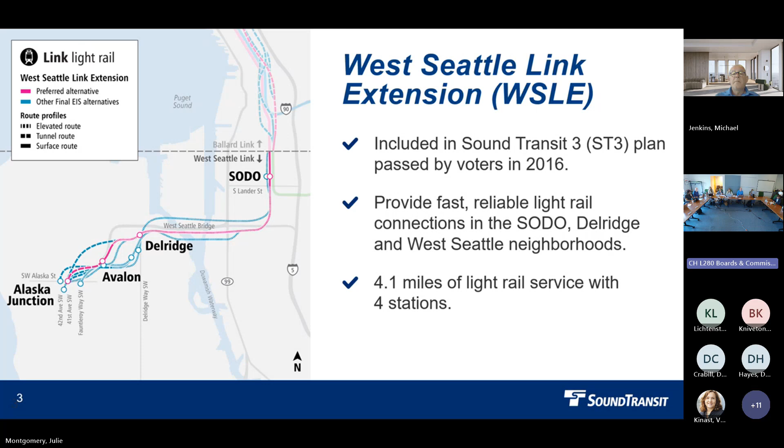So folks may recall the West Seattle Link extension was included in our ST3 plan passed by voters in 2016. We're looking forward to providing fast, reliable light rail connections in the SODO, Delridge, and West Seattle neighborhoods with 4 miles of light rail service and 4 stations.

We are currently still in the planning phase for the project until later this year. Then we'll shift towards design from 2024 to 2027 and construction from 2027 to 2032, with service starting in 2032 based on our current plan.

In the planning phase, we have gone through an extensive alternatives development process, as some of you might recall, and now are in the environmental review phase. We published a draft EIS early in 2022, and had a 90-day public comment period.

We can talk about the engagement level in that. The Sound Transit Board identified preferred alternatives or confirmed and modified them. We are expecting to publish the final EIS late Q3 of this year at the latest. After that, the board will select the project to be built, and we will have the federal record of decision and be able to move into design.

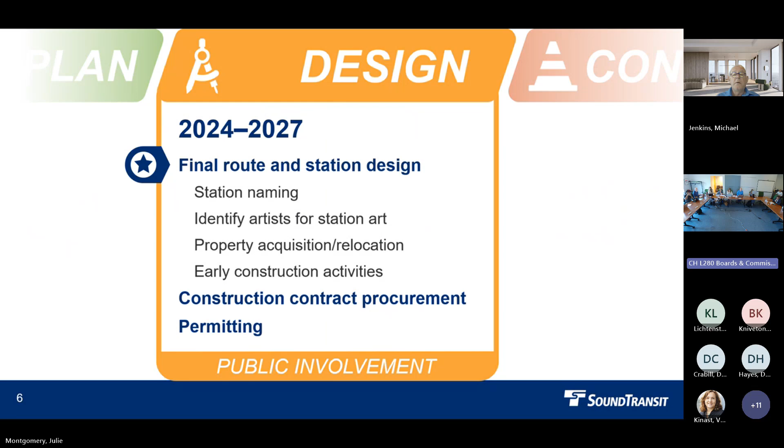In the design phase, we'll be moving towards final route and station design. Some of the activities included, but not limited to, are station naming, identifying artists for station art, property acquisition and relocation occurring robustly at this time, and early construction activities. We'll also have construction contract procurement work and, of course, our permitting.

So for the final design milestones, we are currently in the preliminary engineering design review phase, moving to 30% final design review, 60% final design review, and then a briefing at 90%. Of course, as we move through these phases, there's more and more we know. To get to 90%, we're really at a briefing phase for the project.

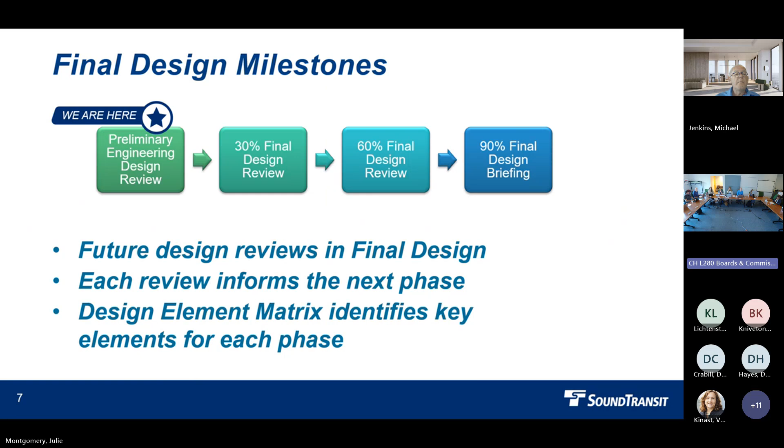Each review will inform the next phase, and the design element matrix identifies key elements for each of those phases, which involves great coordination with the city team. Yeah, for sure. Thank you so much.

All right, and so context and engagement, I'm going to hand it over to, I think, Alex. Des. Des. Yeah. Des. Yeah. Okay, there we go. Oh, good. Okay, so...

First and foremost, we wanted to recognize at Sound Transit our original stewards, and the displacement of many tribes in this region. As most of you know, our people, the Coast Salish people, were displaced from all of our villages along the Duwamish, the White, the Black, the Green, the Cedar Rivers, and even Lake Washington and the Seattle waterfront. When the settlers came to the area, they pushed us out to different regions that we were not accustomed to. We did thrive and we were able to be resilient. You'll see a lot of the tribes throughout the region in different areas, hence the reason we have usual and accustomed areas throughout the Puget Sound.

You can see here two of the photos that we wanted to share, one of the historic houses. This is what our people lived in prior to colonization. We were pushed aside in the early 1850s, excuse me. You see a lot of tribes going to prairie land that they were not accustomed to. This displacement by settlers changed the region forever. This is something at Sound Transit we are very well aware of and work with the tribes on daily, to make sure we are referring to them in the way that they want to be referred to, that we are really understanding that history as we move forward and build the light rail projects throughout not only reservations, but the cities as well. You can go to the next slide, please.

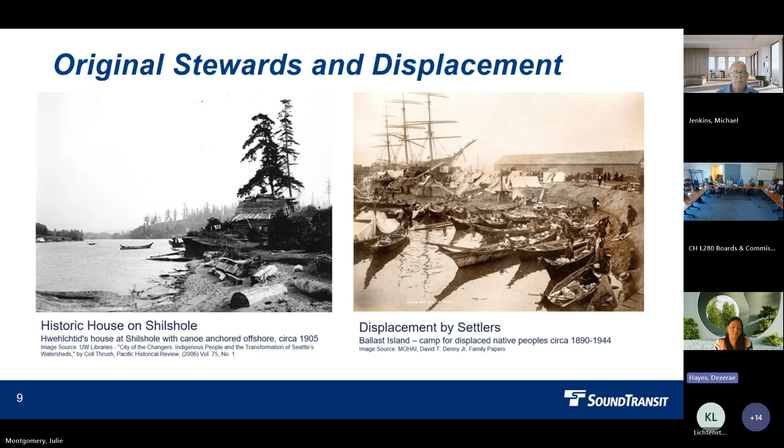Here you will see the history of the waterway. This is a very important place for every coastal Salish tribe, and I work with 14 regional tribes here at Sound Transit. You will all see that the descendants of the native peoples who inhabited the Duwamish and the watersheds around the Puget Sound for thousands of years before non-Indian settlement are still here today.

We are here, working to safeguard these waterways with every move that we make. As you know, we fished for salmon, trout, and steelhead along these rivers. We collected our shellfish here at the Puget Sound, hunted for game, harvested our berries. So it's very important as we move forward that we not only recognize the history of the waterway, but all the traditional uses that are still here.

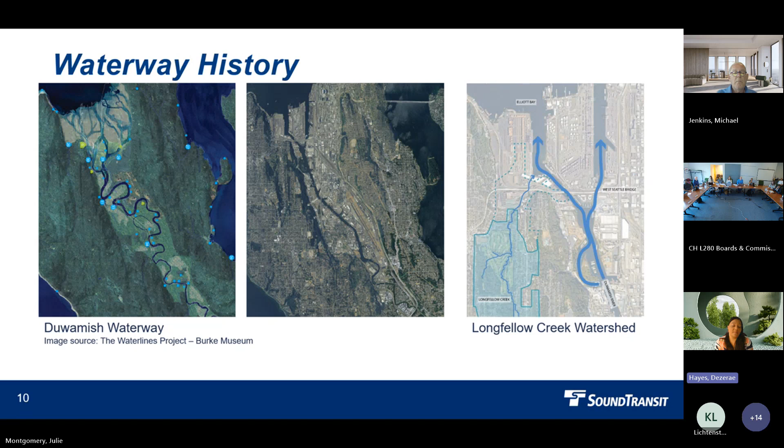We are still here today, and we are plentiful, really working to ensure that our modern history, as complicated as it is, that we are hand in hand with our partners at the cities, the state, the counties, with this group as tribal people. We move forward with the hardships as learning lessons and ways to preserve not only the land, but the salmon and other fish species as well.

You can move to the next slide, please.

This is current, these are our current Duwamish waterway and tribal practices that we still do every day. Annual tribal fishing is huge for our economy. I have so many family members—that's our bread and butter, if you will. That is our lifeline. Not only does it feed us and our spirit, but it helps bring economic value to our families so we can live and practice and carry on our traditions and the way that we were raised and the way that our ancestors taught us throughout time.

So you'll see here a picture of the annual tribal fishing, which we at Sound Transit are very cognizant of, the fact that there will be fishing windows that we will definitely take to the top importance and make sure that we are not disturbing as we plan this major project.

In addition to that, you will see here the tribal transportation. Our original transportation is on the water. I'm a canoe family myself. My family is the Kapoma family from Quinault. I do have family in Muckleshoot, Puyallup, and other areas as well. But canoe journey is sacred to us, and this is one of the very many

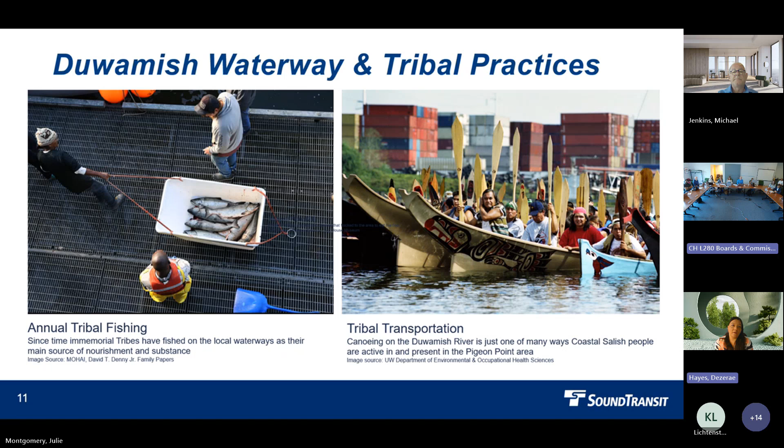current celebrations that you probably all see throughout the area for the last couple decades. We've really brought this back, and we will have canoe journey here July 31st. It will start. So we're still here, we're still alive, we're still well, and we are definitely doing everything we can to protect the Duwamish and other waterways as we build out these projects. You can go to the next slide.

So tribal engagement, as I mentioned, I've been working with my tribe since I was 16 years old. My mentor is Fawn Sharp. She was a previous president of the National Congress of American Indians. I've been doing this for about 24 years as a diplomat, and I also have a master's degree in tribal planning, so I work to build out several large projects throughout the state.

So I'm very well aware of the federal consultation and the cultural resource guidelines that we have to follow. I lead a team here at Sound Transit and guide them as a strategic advisor in these areas. You'll also see Alex on the call, who is my ace when it comes to cultural resources and archaeology. He's amazing at doing that work with our tribes, and he's out in the field with Muckleshoot. I know he was out a couple weeks ago, and we met with them yesterday as well as a larger group. So lots of consultation, tons of meetings going on, and a lot of good notes being taken as we move forward with this partnership that is new for many, within the last 5 years.

In addition to that, you'll see a lot of engagement at Sound Transit with the federally and non-federally recognized tribes. That isn't necessarily consultation—it's something that my team and I really prioritize. So not only are we just consulting, we're there for meetings anytime they need us. We're really there to understand their concerns and make sure that when we build this project, not only are we showcasing our original inhabitants of this land, but that we are ensuring it's a partnership. They're just as proud and happy of these projects as our people in this region are.

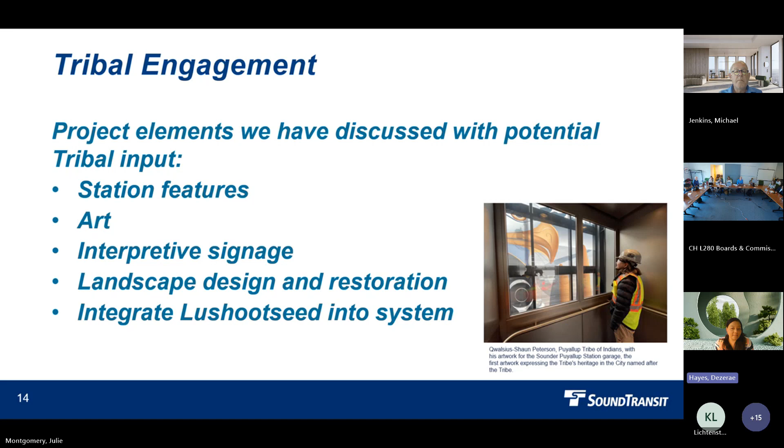So that's short and sweet. Of course, I'm happy to answer questions, but this is just some of the work that we're doing. I think there's one more picture if you want to change slides here. Oh, that was it. So we do have more pictures.

We have tons of documents, or pictures, in regards to the station, and you can always visit. We also have another project at the Auburn station where Muckleshoot is showcasing their art, as that is their U&A. So we really focus on ensuring that the tribes that have U&A within the region have the first opportunity to share culture.

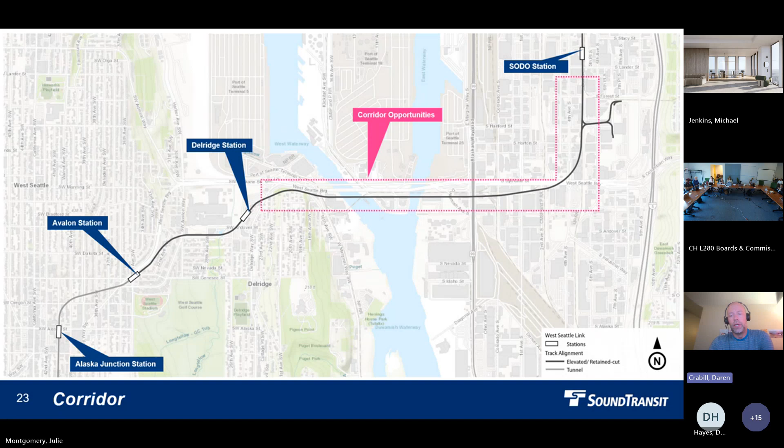As you know, the stretch between SoDo Station and Delridge Station is primarily elevated. There's another stretch of elevated track between Delridge and Avalon. We'll be covering that later in the fall when we talk about Delridge Station. Next slide, please.

The guideway in this section, we're highlighting with the properties we would likely need to acquire for construction in green with the white dash outline. We're looking at all these areas for other opportunities to provide public space and non-motorized transportation pieces. But there are a lot of challenges throughout this corridor as well.

Steep slopes, water crossings, crossings of the Spokane Viaduct, connecting into the existing O&M facility. But with these challenges also come potential opportunities. Our team has looked across this corridor at these parcels for opportunities to enhance those and make them not just a corridor for structure, but for people. Next slide, please.

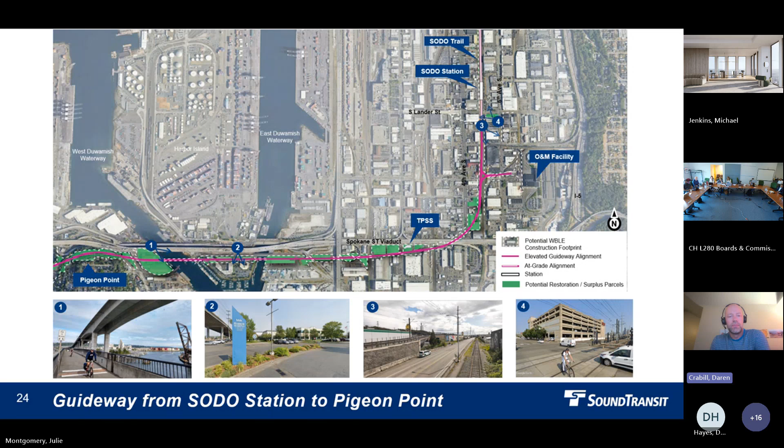In this corridor, we also start with what's happening at the city in their current or planned projects. I want to highlight a couple where our guideway structure is crossing those. On the right side of the map is the Georgetown to downtown bike corridor project, which is nearing design completion, with construction planned shortly. We cross that, engaging it on the north for the Ballard project. We won't talk about that here today, but we also engage it south of SoDo, where it connects into the existing SoDo Trail.

And on the west, as we approach the Duwamish waterway, there are some corridor improvements happening along East Marginal Way. So we work with the city to identify any kind of projects in the area where we can potentially enhance the connection or provide additional connections if appropriate.

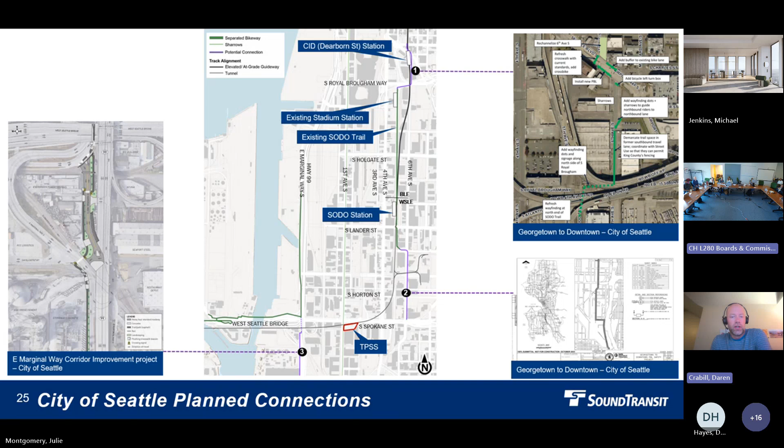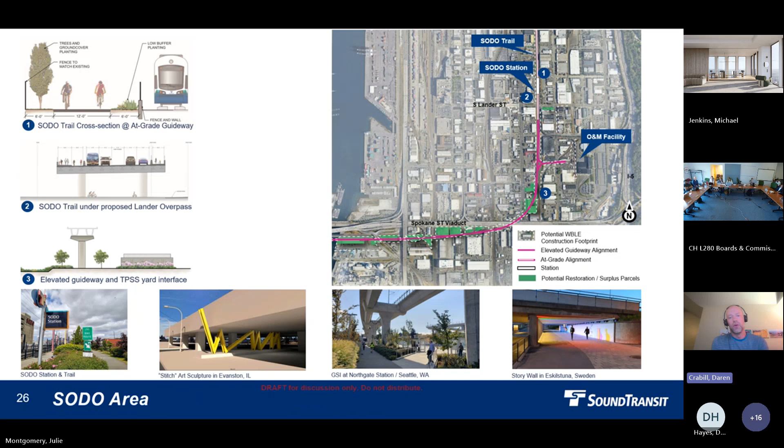Next slide, please. We'll start with the corridor in the SoDo area. This elevated area, we note there will be opportunities to engage at the SoDo station. We know there's a long history of art through this corridor in the SoDo busway through activation of murals. There are also opportunities for enhanced landscape, potential trail connections, and additional lighting. These are all things the team has looked at a high level through this corridor, and we'll continue to investigate those opportunities as we move forward in further stages of planning and design.

Next slide. Thank you. At the Harbor Island area, where the Duwamish River crossing has several landing spots for the structure, we've looked at several different options for providing enhanced landscape and potential connections to existing trails that cross the lower Spokane, near Spokane Street. Along the water edges, we know there's a requirement for restoration, and we have to look not only at the minimum, but also some enhanced opportunities for enhanced restoration along the water's edge.

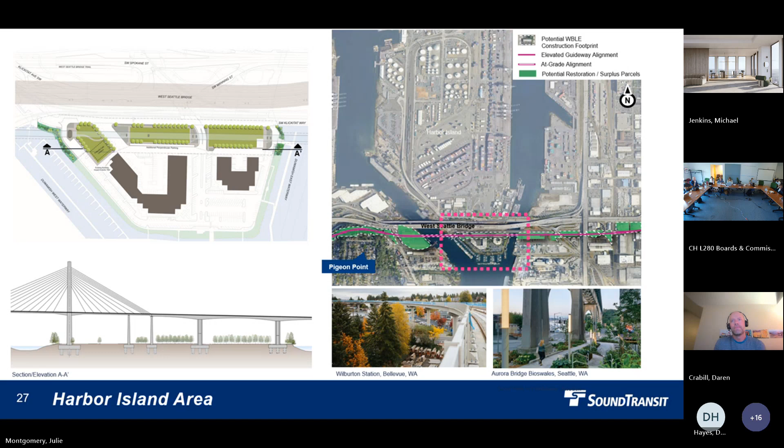Next slide, please. As we go further west towards West Seattle and the crossing, the West Duwamish crossing portions directly along the waterway are again being considered for shoreline restoration per state requirements, but also additional areas depending on how land is used after construction. In the dark green, you'll see pieces where ST will likely continue to control portions of that land, using it for stormwater uses and enhanced tree plantings for additional tree coverage.

The light green can also be used for those uses, but there's also a potential that portions of this land could be returned to water-dependent business operations, or be surplused for that purpose. I'll also highlight that all the lands adjacent to water are in constant conversation with the tribes, as well as with the city. There's a lot of interest in those pieces of property.

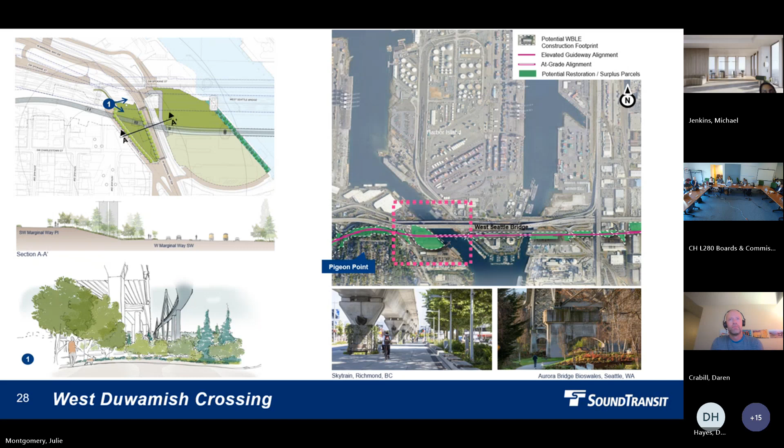I know there was some discussion in our last briefing with you around what is a TPSS. These are critical infrastructure for link operations, providing power to the light rail, and they have to happen at certain intervals. Daren can tell you much more about that than I can. But there's some interest in understanding what they look like and what we do around them.

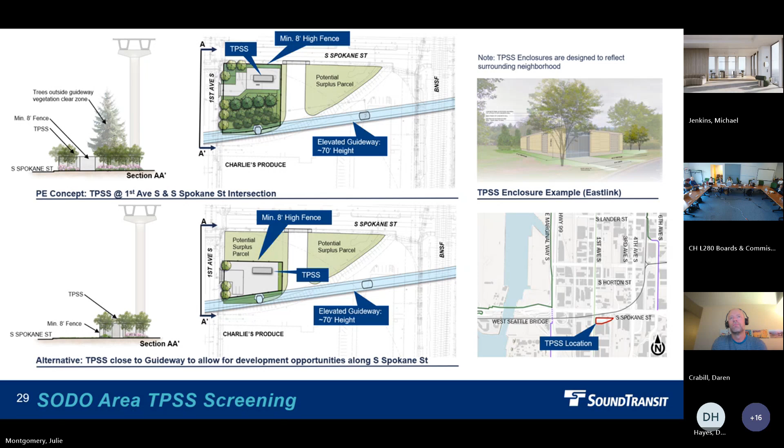Next slide. And I think that's it for me. Thank you. All right, thanks, Daren. And we're going to pass it to Dirk now to talk about long-span structures.

Thank you, Daren, for showing the ground. Now we'll talk about the structures. The elevated structure that we're going to be speaking about today is the stretch from SODO Station, where we are at grade, to pretty much Harbor Island. We'll talk about the Duwamish crossing later. So these are the guideway spans that we'll discuss today.

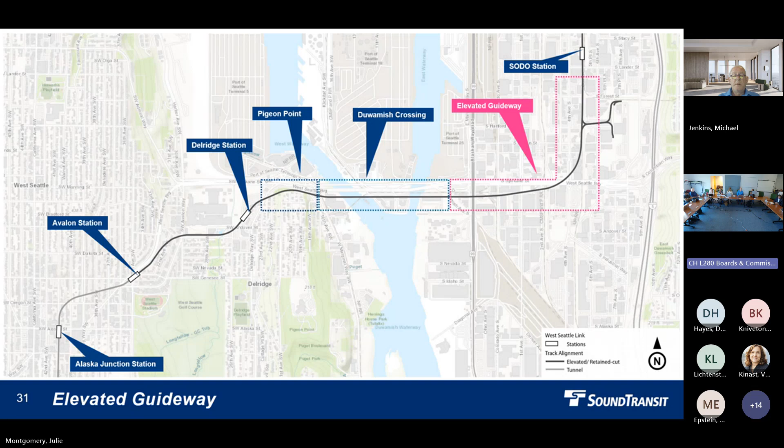The title here says long span guideway. Just a little preamble to that: Sound Transit typically likes to build like 130 foot long span length, and you'll see those span lengths on the Lynnwood and East Link projects. This project over here is a little different because of all of the other infrastructure that is in this area that we would need to span, and properties and so forth. So in this area, most of the spans are what's considered long span, in the 250 feet and more range.

And so we're using superstructures, which are the decks. These are segmental box girders, and we prefer to build those in balanced cantilever style. We selected those segmental box girders because they're very functional, they're structurally efficient, especially in this location, and they provide redundancy. We've done these before, and by going long span, we're minimizing the foundations on the ground.

A majority of the piers, because of their length, are double leaf columns with fill sections between those columns near the ground. These double leaf columns are kind of evolutions from piers that we've designed before in previous projects, and we'll show some of those. An important aspect is that we really looked at the compatibility between the cable stay piers and then the piers of those long spans that make the approach to the cable stay.

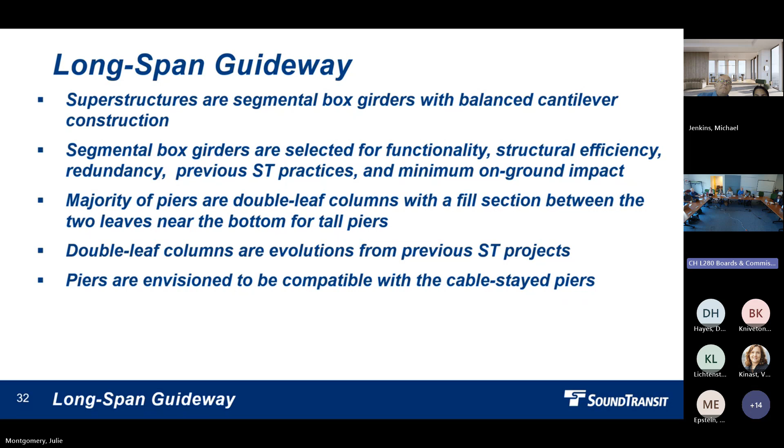Next slide, thank you. So these are some examples of work we've done before, and you probably are familiar with it. This is Central Link examples, and you can see there's double leaf columns there, and these are long spans and cantilever.

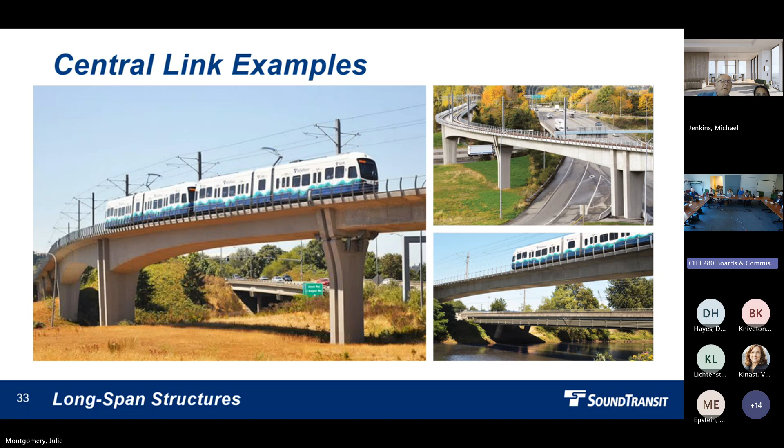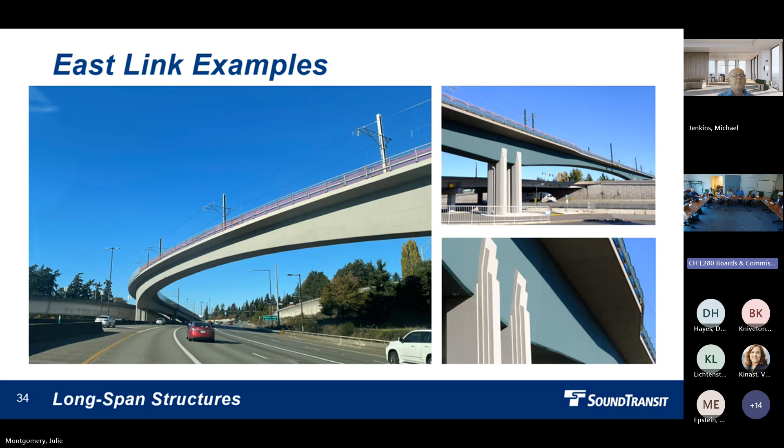Next slide. Here's some Eastlink examples. This is going over I-90, that's a very long span. And then there's the span over I-405 in Bellevue, and you can see some architectural enhancements as part of that project.

So this proportion and scale, this has been an item for us, if I may say. It's been a long puzzle to get all the columns and spans figured out. We started out obviously with shorter spans, and then through progressive iterations, we settled on a number of spans that we currently have. So we're only really showing where we ended up, but obviously a lot of work went into that.

But one of the things that we really look at, because this is such a high structure, it's very visible, and so it'll be viewable from a lot of different locations. So the proportion and scale has been really looked at from an engineering and architectural perspective. I won't go through all of the dimensions here, but the point is, because it's so tall and the structure is so big, proportion is very important.

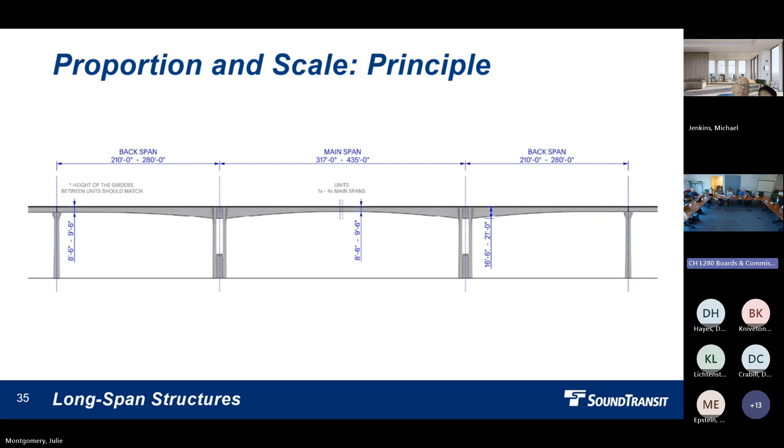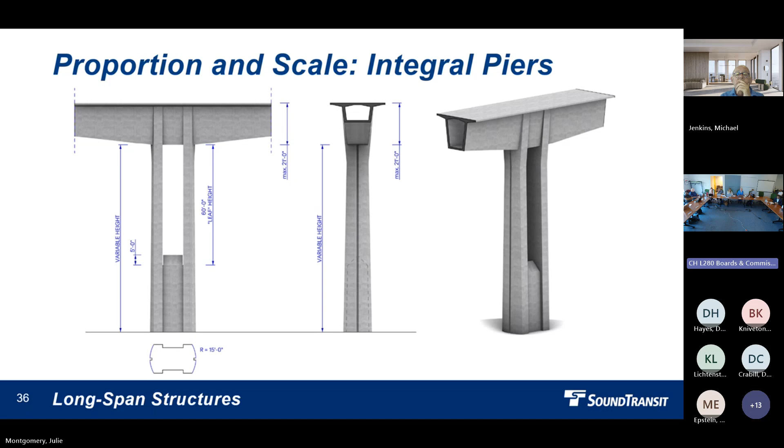Next slide. Here's a little view of the piers that will be integrated with the long spans themselves. And you can see again, we've given that a lot of thought. These are some of the ideas that we think would work very well in this area. And you can see the double leaf columns and how they're integrated with the spans.

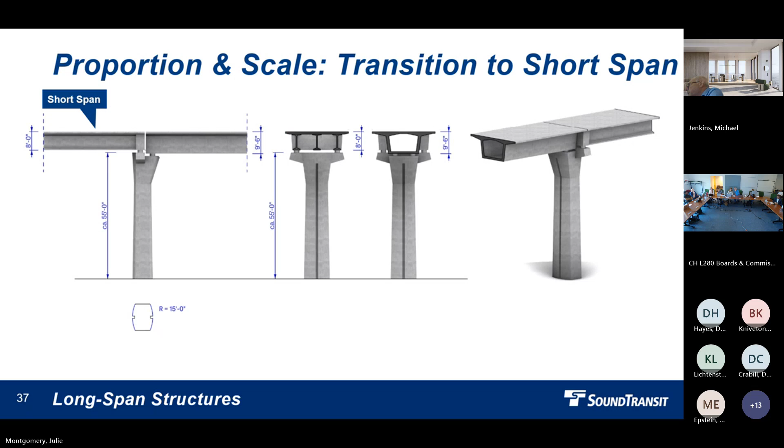Thank you. Here's another slide that explains that. So our typical short spans are pre-stressed I-girders, which you can see on the left side in the picture. And you can see how we'd transition to a longer span, which would have a different girder type, in this case a box girder.

So the columns we're using for our shorter spans, which we've used on our other project, are octagonal and have a cap. That's nothing new. That's been accepted on other portions of our system, as you can see at Sound Transit on East Link, Lynnwood, and the Redmond Link extension. It's just an extension, and we do like to have a certain standardization where that makes sense, and we believe in this area that makes sense.

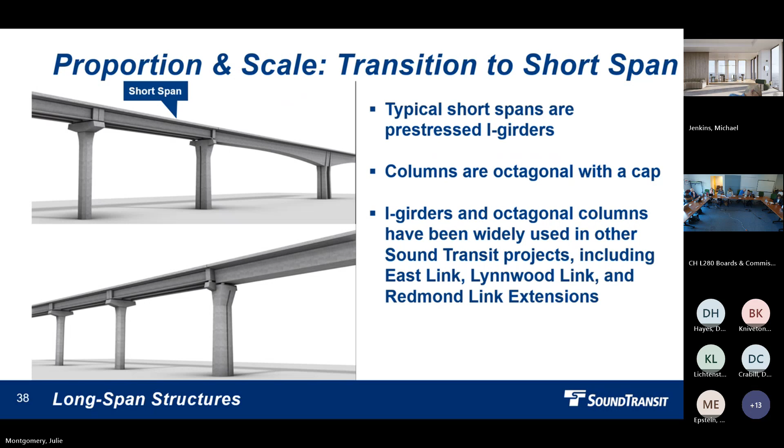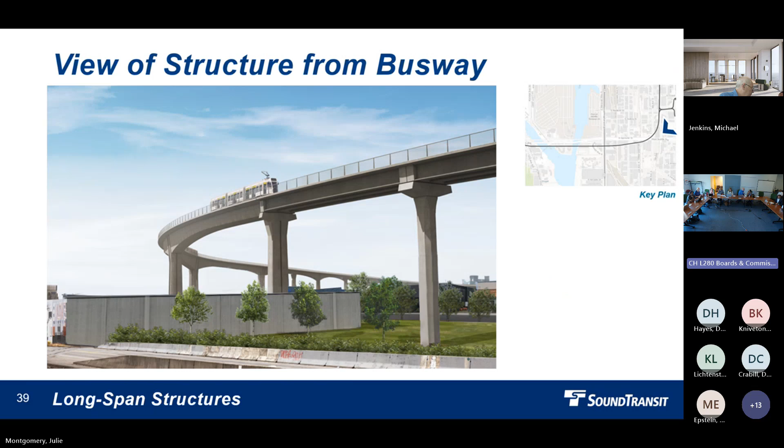Next slide. This is more of a rendering of that transition. We're trying to really focus on the structure here and how that transition would work. This is a view taken from standing on the E3 busway, looking towards Fourth Avenue. You can see the transition between those structure types.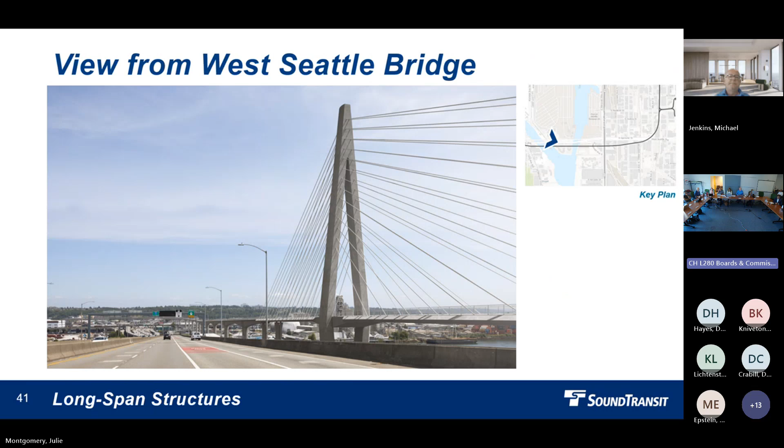I think this is an important crossing. If you were on the E3 busway looking at that structure, and potentially in the future there's other programming there, you would see it standing up. Here, you'll always be seeing it driving your car, and it's important we keep those proportions in mind because this will always be viewable.

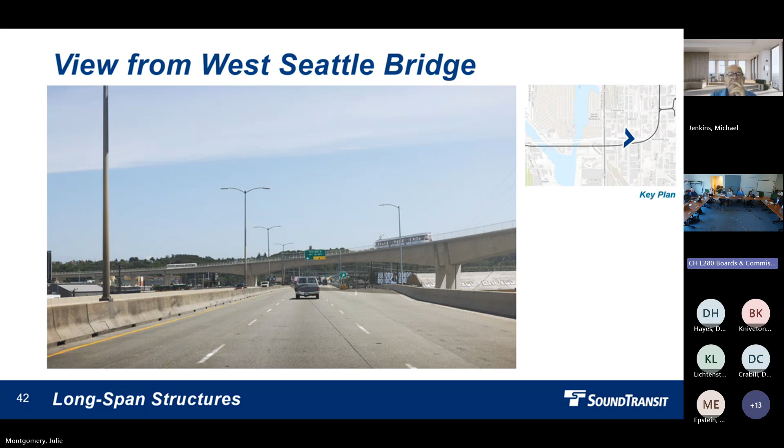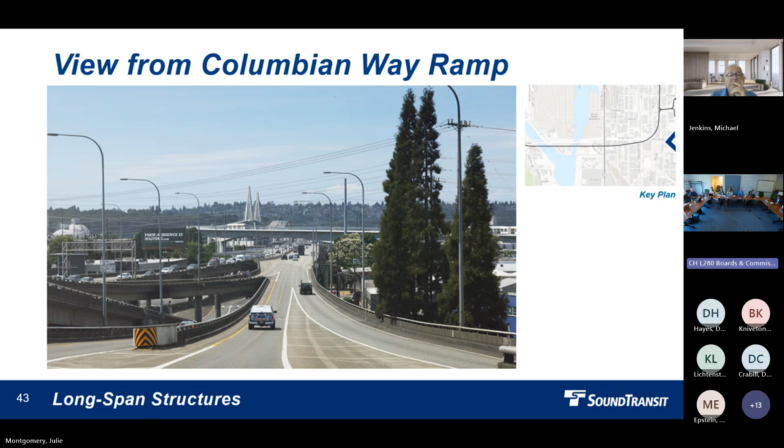Next slide. Here you'd be coming from the other direction, and this gives you an idea of the size and scale of this structure. Obviously it's not out of place in this area where there's a lot of big things, but here it's crossing Spokane.

That was a lot of information. We took you from the overall project timeline, revisiting some of the outreach and engagement. Dezerae gave a much more in-depth picture of how we're engaging with the tribes and that work that's been going on. Then we talked about some corridor opportunities along this segment of guideway, and then we talked about the actual guideway.

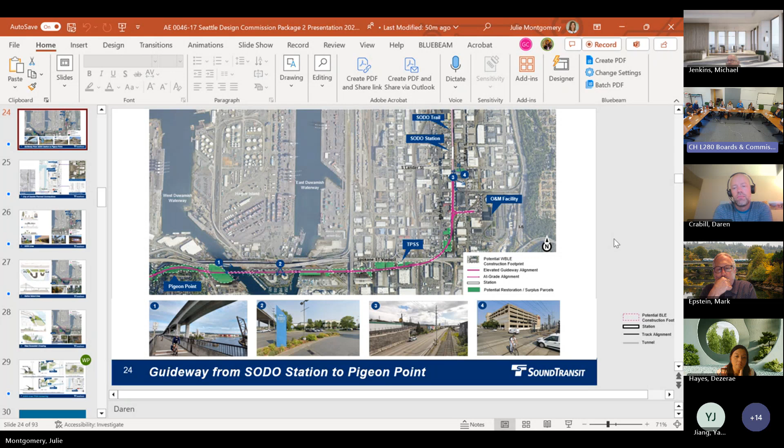typology, right? We're looking at very tall structures, and a lot of the ideas is the land that's adjacent to it, but not necessarily directly under the guideway. Are we fencing off the directly under portion, or are we trying to activate that? How is that associated with these parcel plots?

Yeah, so I mean, at a baseline, we have a lot of landscape restoration and trees. We hope to incorporate into some of these along the stretch. But that's at the most basic level.

This is a really complicated stretch from a land use perspective. So it's not exactly a place where a softball field is, maybe warranted. Not that I took your suggestion literally, but just as a point of reference.

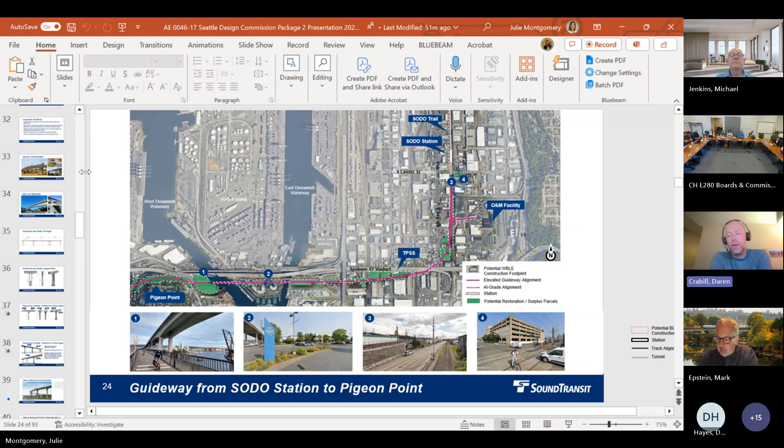Also, the land is not that big in a lot of areas, and where the land is of significant size, we do need to balance the property that we retain for operations and maintenance with trying to make the most of its use in this critical space of industrial and type of land use that is really important to the city and this region. So it is a balance, and we'll continue to need to weigh those different trade-offs and the needs of both Sound Transit and what can happen there.

Now, we have looked at and worked with the city to consider, for example, would it make sense to put a bike trail through here or not, or different bike connections or non-motorized connections? The stretch between, let's say, the East Duwamish Waterway along Spokane Street is really complicated because there's lots of rail lines, there's lots of freight traffic. There's already existing bike infrastructure to the north side of there. And as I showed, there's a new connection happening north-south, East Marginal Way.

So we have looked at it. We'll continue to look at it and see what makes sense to happen. But it is a balancing act, and it does need to weigh in some of those safety factors. And is it a corridor that wants it, needs it? Does it align with the city's plans long term for that type of infrastructure? So we're looking at a wide range of uses underneath the guideway, but we do need to consider where we're at in the city and the land uses in and around it.

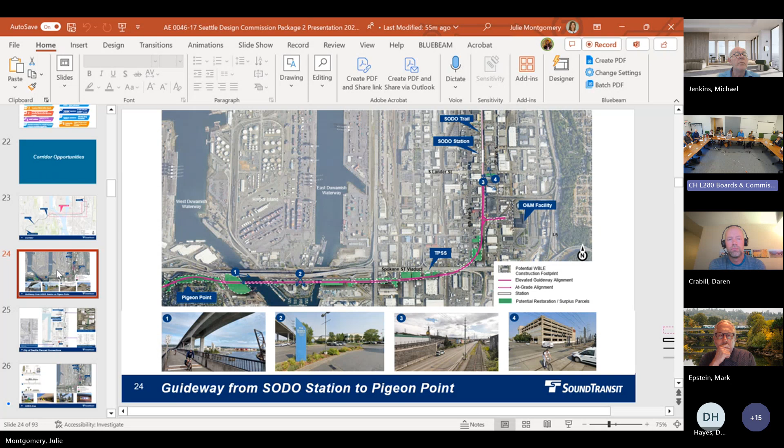Thanks everyone for the presentation, and I'm looking forward to seeing the more detailed info as well. But it's really exciting. And Darren, I actually had a follow-up question for you as well. I was just curious, on my version of the presentation on page 28, you mentioned it briefly, but I couldn't quite hear. Could you clarify again what that light green swath of land is for

at the West Duwamish crossing? Yeah, this is our best guess right now of land. Like the darker green is likely land, subject to change, of course. Likely land that Sound Transit would consider holding for maintenance and access to the guideway.

The lighter green will consider different types of surplusing. It could be surplused back to the market for land-related uses, or maybe there's a conversation with tribes and the city about other types of uses. So I think that's the land where there's a little bit more flexibility in how it could be used in the future.

And do you think those conversations or updates might be shared at 30, 60, 90%? Yeah, I think we'll continue. It's an evolution, of course, so we'll have updates as we go and provide them as we have them. Lots of those conversations are sensitive for different reasons, but where we can, we'll definitely provide updates.

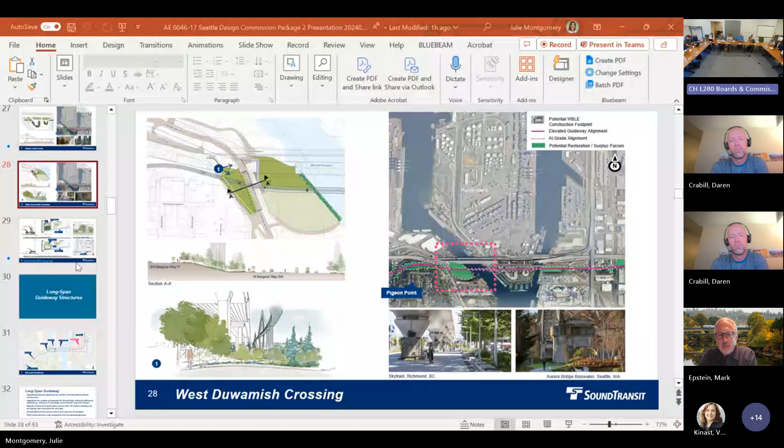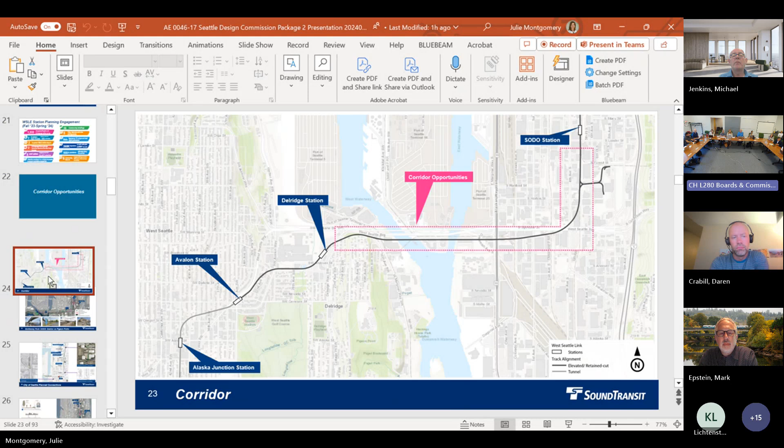So I have a couple of questions. It seems like, Darren, there was a page and a detail that you went by that wasn't in our packet, and I think it's around page 24. You can go there. It went kind of quick, my eyes don't focus. Is that one maybe? That's just an overview. To keep going forward? So that's jumping. It's this one, right? What's that detail in the upper right? I can't read any of that. So we blow that up?

I will, yeah. That is the connection from Georgetown to downtown. This is a city project, City of Seattle SDOT project, providing bike lanes from Georgetown up to near Lander, and then it connects in with SODO, and then the existing SODO Trail, up near the existing stadium station, and then it takes a little bit of a jog up to 6th. So that will be that piece right there. That is the best graphic that we have from the city, unfortunately. It just sort of suggests where some painted bike lanes will go in the interim.

But we'll definitely be addressing this later on when we talk about the Ballard extension. So just wanted to show the overall connections and how we overlap between different projects that the city is planning versus the Sound Transit project. And so the point is that you were trying to do future coordination for that, is that right? Yes, exactly. Okay, great. Then on the guideway...

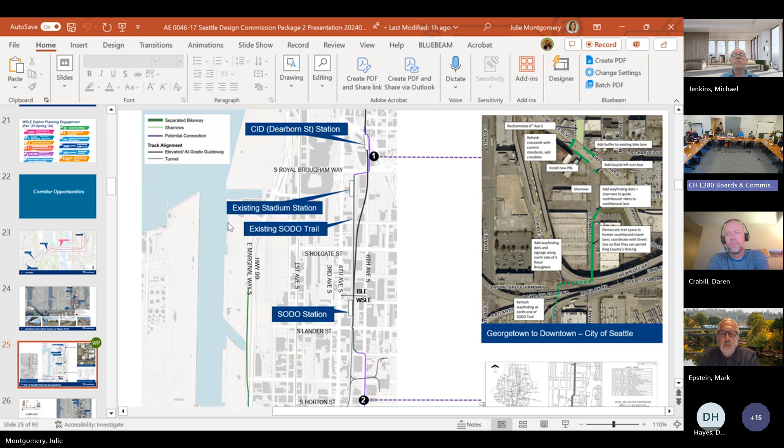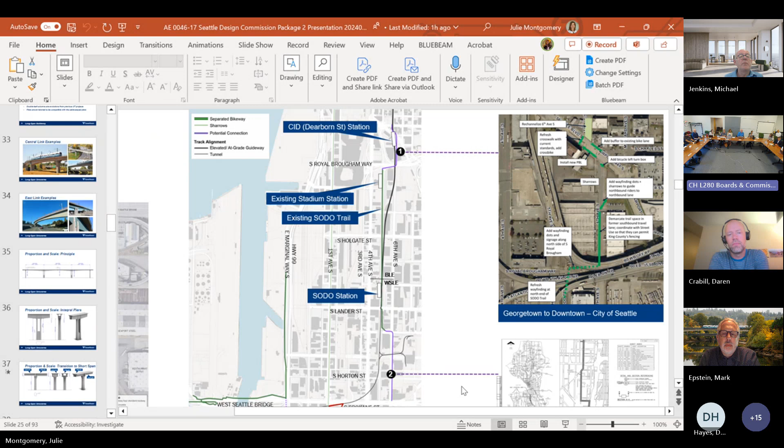Again, I was trying to make sure that I understood the big picture. Were you trying to say that the short spans and the mid spans and the long spans are going to have different articulation that will be viewable, or that it's all going to match from the sides?

It's going to be nicely detailed, I think. But, you know, in order for it to be a nice transition and not something that... what's the right word? Clashes. Clashes, yeah. And so that's what we intend to show with this.

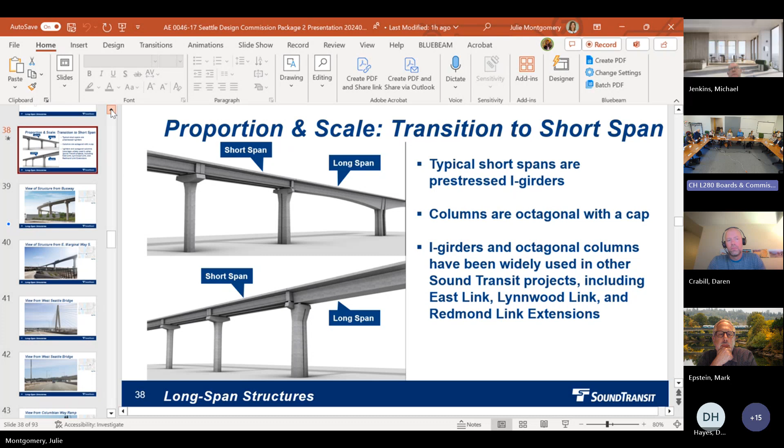So you can see there's a different column that is being used for that. Yeah, but on the span itself, it looks like there's different articulation at the bottom. Yeah, the long spans are box beams, so they're basically closed beams, and then the short spans, at least in this typical configuration, are I-girders, so they're just concrete on the eyes at the bottom that I see. Yeah, so when you're just looking at it, it just looks flat, but... I think there's a section that maybe shows that more clearly. I think it's like one page before or two pages before.

There you go, that's it. So I couldn't tell if the big picture messaging of pages 39, 40, and 41 is that you're not going to perceive any of that, you're just going to perceive this sleek thing up there, or if you are going to perceive the differences in that articulation, or that you're trying to not have an abrupt change from one structure to the next. Yeah, I mean, that's what we're trying to show here.

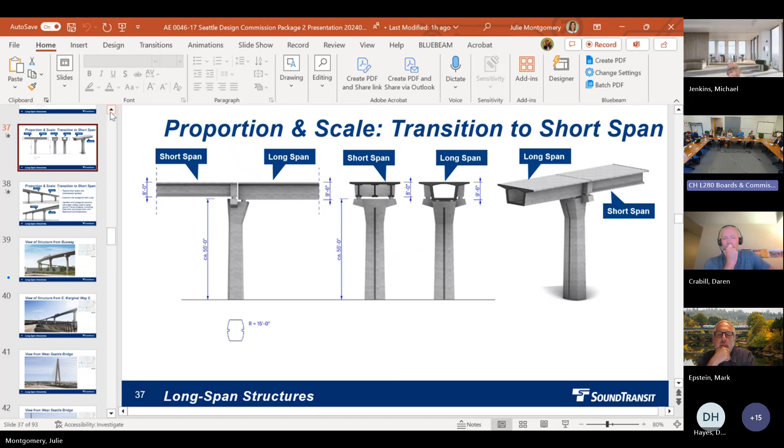You know, as to how much the box girder is at a slight angle, right, and the shorter spans, which you won't see -- you know, on those, where you could see it on 39, we were trying to show it there -- but they're two different systems, and you have to marry them up, and you have to do that in a way that it doesn't clash, but that's, you know, I think you used the word elegant, right?

So thank you for that, and I think the proportions of the bridge -- we did not only have an engineer, but we also had an architect look at that and kind of refine that a little bit.

The proportions are what's important on such a huge structure. You know, is it going to look strange, or is it going to be pleasant to the eye? There isn't, at least I cannot say more than it's there so that we can transition to different structure types.

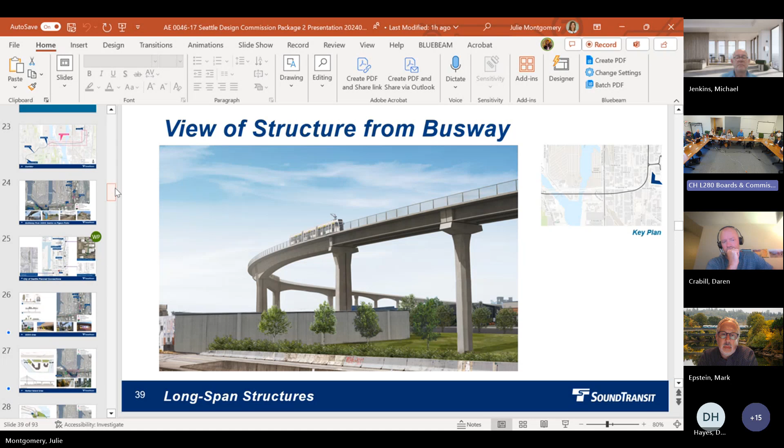Okay, thanks. I think Molly had one additional question for you. This is a question for Darren as well. I'm curious about a little more specificity between Marginal Way along Spokane Street, from Marginal Way over to the SODO Trail or the Georgetown to SODO connection. Can you share some of the specific challenges in that area for bike connections?

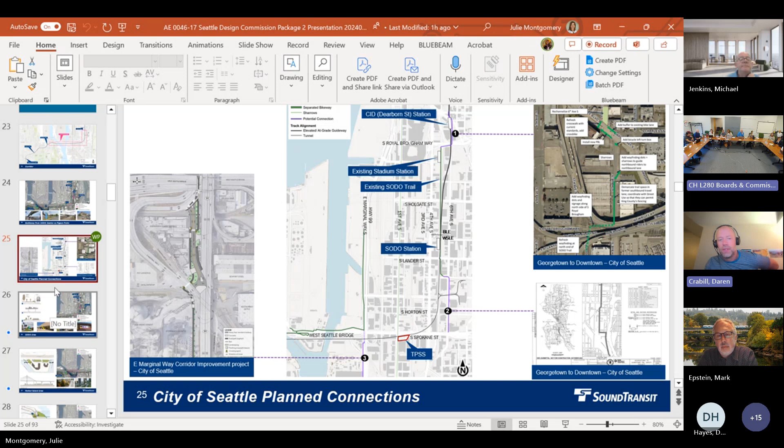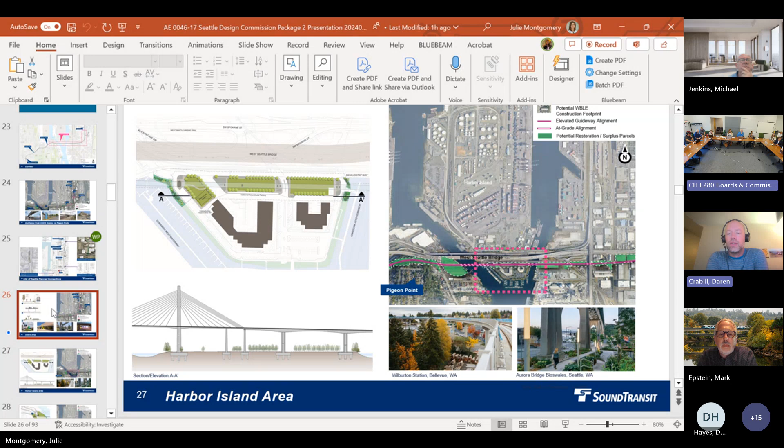Yeah, there's actually quite a few rail lines. If you were to look closely down there, we don't have a great image of that, but if you were to walk around, there's lots of spur rail lines that make crossings quite difficult. So not impossible, but not a shoe-in like we should definitely do this. We'll have to continue the conversation with the city about whether this really is a desire line for bike riders, because where it's coming from is not where bikers are coming off of.

There's quite a bit of interest coming off of the lower bridge from West Seattle, and to then dip down south to under the guideway doesn't necessarily make a lot of sense, where you're going to have just as many crossings, if not more, because of the spur rail lines and other things, and truck traffic. So we'll continue to look at it, but it's a really difficult stretch there.

And a similar question for going from Marginal Way over to the Lander Street crossing area. Has the team studied that east-west in depth? So if you were along to the Lander. Yeah, so then going east-west on Lander.

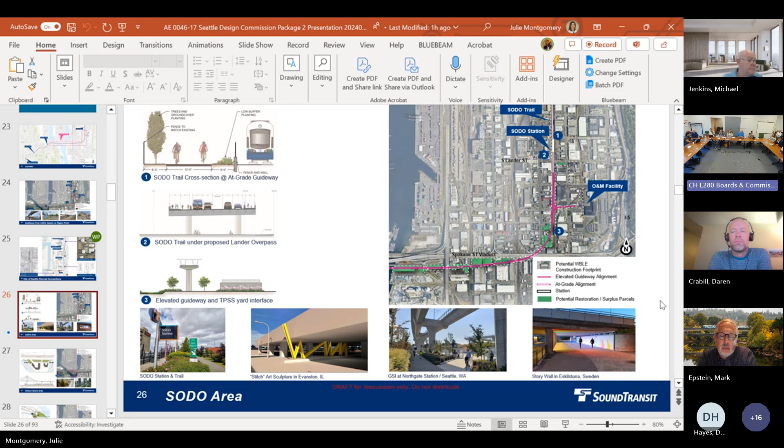I have no further questions and looking forward to the discussion. I think you've got 4 categories that you've identified for discussion, and people will just raise their hands if they want to discuss those topics.

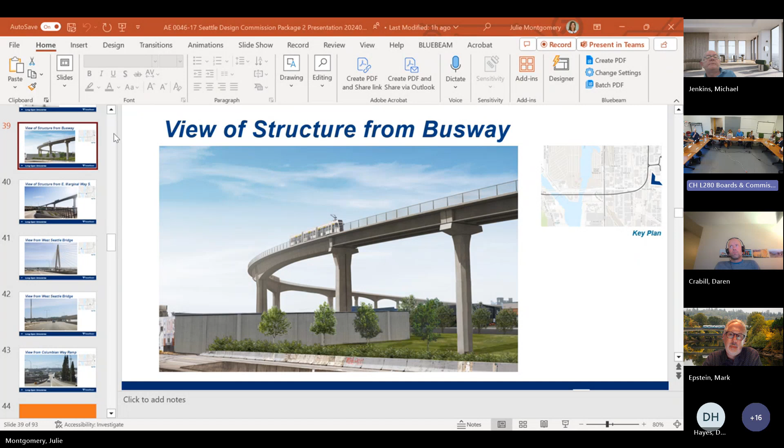Can you pull up slide 39 of your presentation? One of the things I was noticing about the design of the columns - there's sort of two families of columns, as I understand. There's the short span and then the long span column. Maybe it's the slide that shows where the transition happens. Like that one? Sure, yeah, that one's fine.

So there's two different column types, not necessarily shown really well here, but it looks like where the transition happens, it's sort of half of one column and half of the other, which creates a third type. I'm wondering, for the team, if it would be a cleaner design if one of those column types could be chosen. I know it'd be kind of fake because the engineered structure seems resolved and solved here, but it's like a third column - a little bit of a Frankenstein column, or it feels like it to me. I don't know if I really have an opinion on which side it went, but I think it would be a more elegant solution if you chose one column to make it look like one column rather than two glued together.

I think this slide is a little more complex than it seems, because we also have a transition from the long span to the cable-stayed bridge, and that's another transition. This one is probably in the north-south zone right before you turn to the long span guideway. And then within that long span, we're actually going to transition from the box to the larger bridge, and then you have that transition as well.

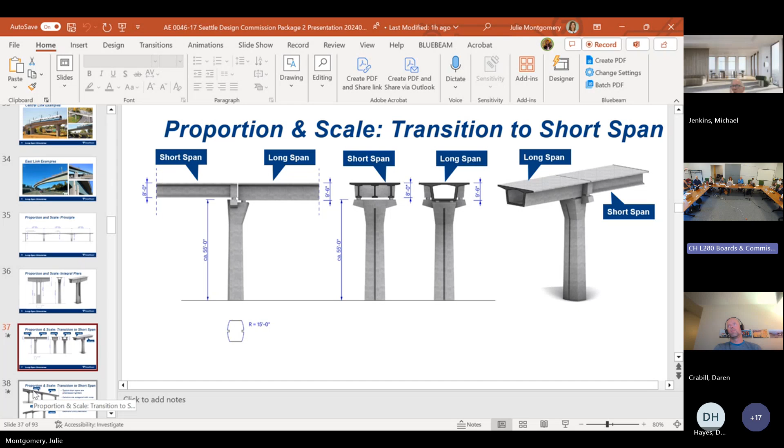It shows the need for a family of forms to be consistent. Can you see that top image? Are you referring to that? Yes, and even the bottom one too. It's got the corbel that sticks out of it on the short span, and then the long span is flat, so it does look like you took two columns and glued them together, sort of.

I'm just wondering if one of them can take ownership of the aesthetics on that column. Yeah, that was going to be my exact same comment. I don't mind that they come together, similar depth, let them be what they need to be, but just make it look like one or the other, not a third type of column.

And I guess I would lean toward the short span version, kind of just making a thicker version of the short span one, and then letting the two cantilever portions kind of be.

We have some people chomping at the bit. And they'll get their turn. Okay, but it seems to me like this is just shaping up to be a recommendation.

At 30%, we'd really like to see all of them on a page so we understand continuity a bit. Are you saying more continuity between them? Yeah, well, I mean if it's related to that continuity—this may be too large of a question—but because the needle diamond has such a specific aesthetic to it, there's been a lot of choices made around that. I'm wondering if some small elements from that could be referenced as cues and clues in those spans, in the form of those spans.

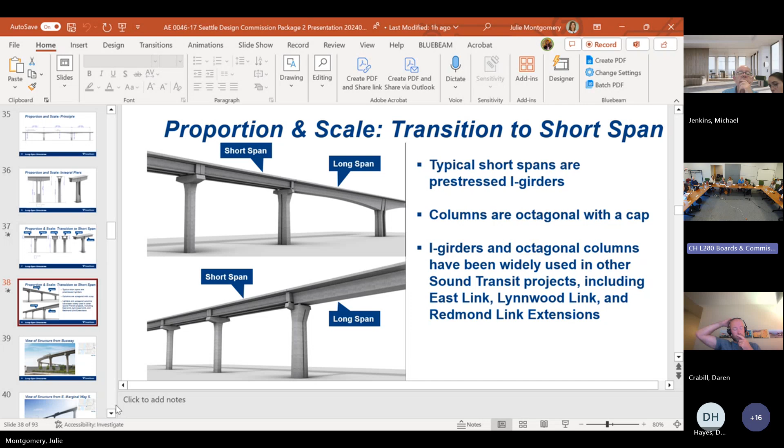Your numbers are different than our numbers. It's two above, the next one. That bridge, and then zoom in on the interface between the cable stay and the long span structure columns, at the base of those columns. Those columns are what I'm trying to reference—there's another transition.

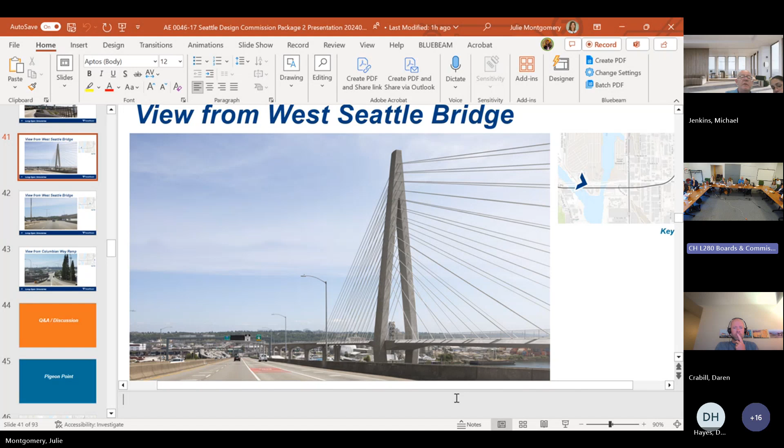I'm getting there. Not the diamond column, but the one that's the transition between the box girder and... way back there? No, like right where—oh yeah, good, that's actually better. This guy, that deep box girder comes into a column and then it's just a flat deck. There's another interface that we're not zoomed in on.

Okay, well, would we agree we just need some more information at the 30% and maybe request that, rather than a new column type, that could then be a recommendation. Yeah, so I think just reduce the number of column types to the minimum, explore the first one that sort of rises to the recommendation here—avoid mashup column types.

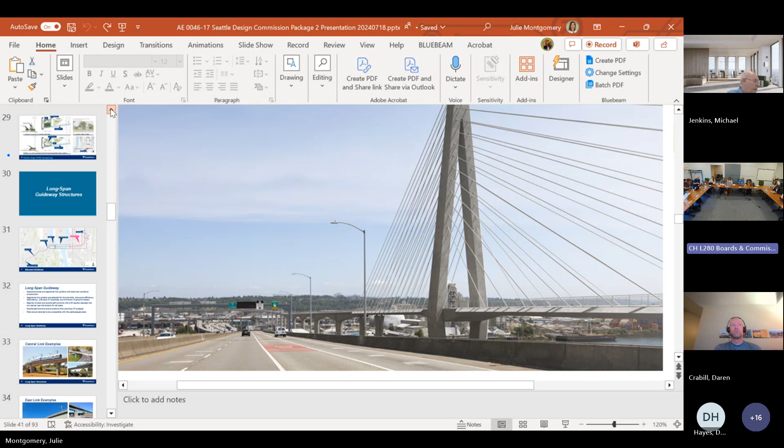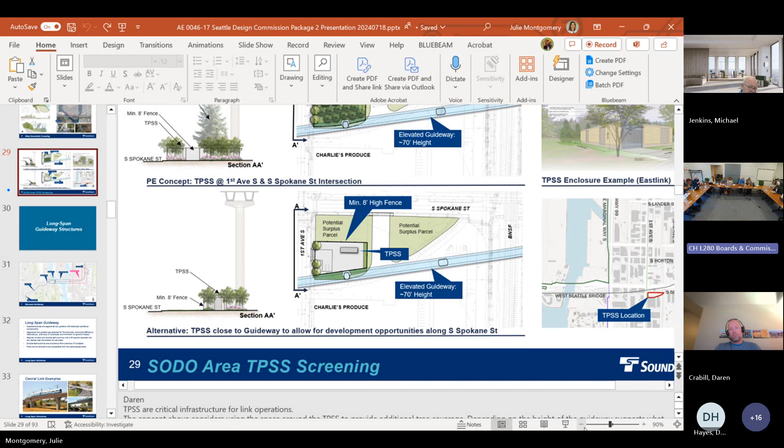And then, maybe this was more on the corridor opportunities, I think it's called the TPSS sites. I'm wondering, in a similar vein, if there's a language—I don't know how many of these TPSS sites there are, but there's one along the SODO Trail. I'm wondering if there's an opportunity to have all of them share a language or an art concept, so that across the city they're recognizable and there could be a bit more fun aspect to them, rather than, sometimes the design of these things feels like it's just a more expensive material, and that's the design.

I wonder if there's a more creative approach to either the fencing or the color—something that has a surface that's almost like its own little art installation, that's maybe recognizable, or maybe each one's independent. That's what I was wondering.

So I see that image on the top there—it very much looks like it's designed to protect some sort of infrastructure, a little electrical substation. And I wouldn't personally be looking for anything expensive or even more expensive materials, just a little bit more creativity and expression of those protections.

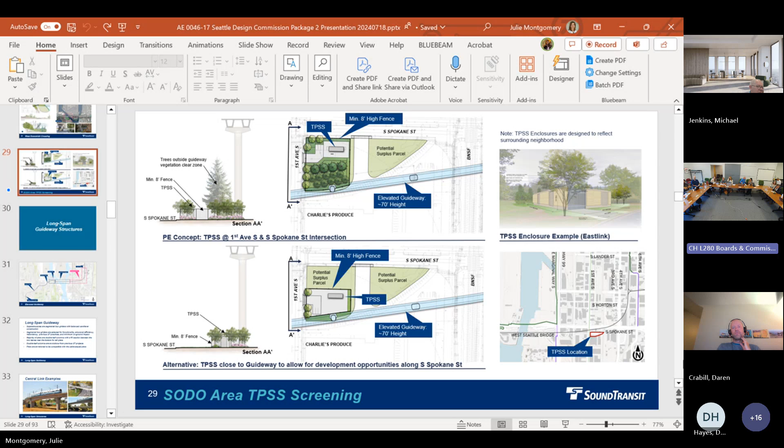Could we zoom in on the one on the top right? Could we zoom in on the top TPSS? It says Eastlink. But some identity and maybe an element of continuity would help.

Or can that live actually under our guideway and give land back? Right, talking about reflecting the surrounding neighborhood. Yeah, I mean some are in single family areas—I don't know if they really have it, they're in different types of settings.

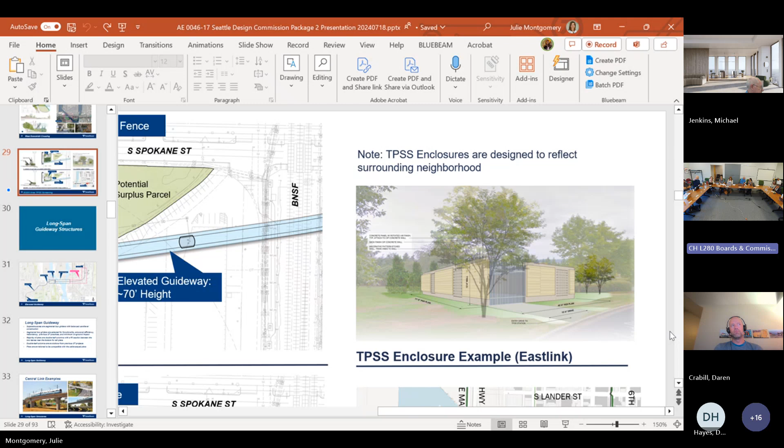Maybe in the single family areas they're trying to go away from it, but in a more industrial area it could be a bit more—I'm kind of thinking, along the light rail corridor as you go through SODO, I really enjoy the graffiti art they put on the back of all those blank warehouses. It's just kind of a neat experience to go through.

So I'm not the artist here or anything, but I just think something like a fancier fence, or CMU, or something would help. It does feel like a moment when a TPSS in an industrial area is something very different than a TPSS in a residential neighborhood—it's almost like it's come home, and it belongs there. I mean, some just intentionality behind the design of it is what we would want.

Okay, so you want to compile your stuff? I have a couple more things, just—I know we're running short on time.

So circulation, the bikes and pedestrians—that's your comment about SDOT. Okay, so that kind of falls under this as well. That's not house circulation, so that would be the presentation on bicycles to us by SDOT, and continued coordination between Sound Transit and SDOT.

And then I was just wondering, I didn't see anything on sustainability. I know that public transportation is in itself sustainable, so I'm just curious if there was any additional information you guys might have for that you could share with us—just a request on whatever you guys are looking at doing.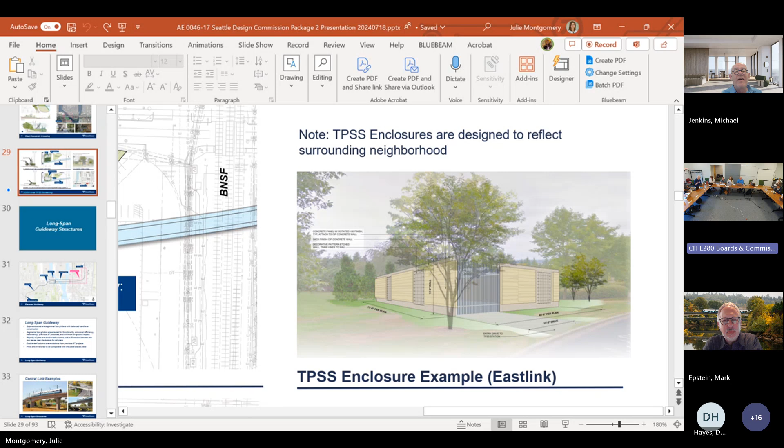So I think we're voting on this, correct? Yeah, we are voting. So, Seattle Design Commission, we're recommending approval of the preliminary action phase for the SODO guideways. The only recommendation I believe we have right now is to take a look at the columns and come back with a more cohesive column language typology across the site. There was one recommendation about the under-guideway - just to look for appropriate uses for this specific SODO area, and a list of appropriate uses and partnerships with support that might be needed.

Would we add to that continuing coordination with SDOT to understand bike opportunities in those areas? Is that a recommendation as well? Recommendation - yeah, it's not a recommendation they need to follow, but let's get it in there. So it's definitely us with SDOT, and then continuing coordination between the department and Sound Transit.

Do others agree with that? I think in our action we can say we appreciate certain things, we look forward to future coordination and other things. But our ask of transit specifically, as a recommendation, is that we're really looking forward to more coordination on the guideway, on the column types, and on the under-guideway uses. I believe Barbara even brought up the idea that we might throw some ideas out there too, so we might have to put that in - it's a mutual list of uses, not just us putting it on them.